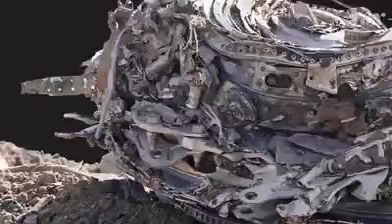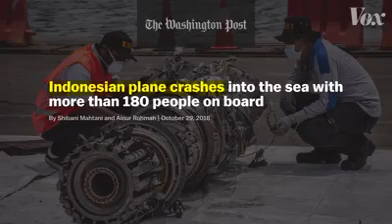This is an airplane engine. It's sitting in a field in Bishoftu, Ethiopia, part of the wreckage of Ethiopian Airlines Flight 302, which crashed on March 10, 2019. 157 people died. This was just a few months after another flight, Lion Air 610, crashed in Indonesia and killed 189 people. These two flights were operating the same plane, the Boeing 737 MAX 8.

And its engine is the key to understanding why this particular plane has caused so many problems. But there's nothing actually wrong with this engine. In fact, airplane manufacturers raced to put them on their new planes. That's where the problem started.

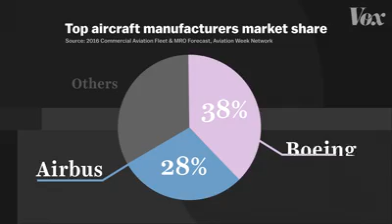The two biggest airplane manufacturers in the world are Airbus and Boeing, and they have a fierce rivalry. If one of them can offer a better plane, the other could lose a lot of money. That's exactly what was about to happen in 2010. Airbus announced that they would update their most popular model, the A320, a single-aisle airplane that services many domestic flights. You've probably been on one.

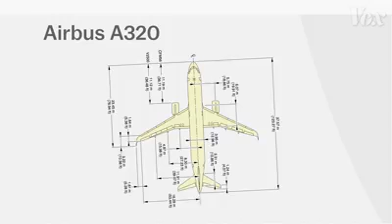For this new plane, Airbus had a big update. It would have a new kind of engine. It was much larger than the previous engine, but it would make the plane 15% more fuel efficient. And just as importantly, this upgrade wouldn't change the plane that much. A pilot could walk into the new model with little additional training and be on their way. It was called the A320neo, and it would save airlines a lot of money.

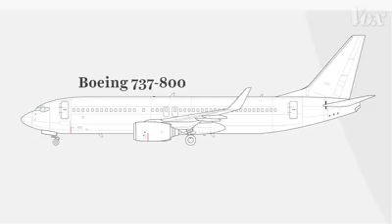This was a problem for Boeing. To compete with Airbus, Boeing's obvious move was to upgrade the engine on their single-aisle plane, the 737. But there was one issue. Here's a sketch of the 737 next to the Airbus A320. Notice how the 737 is lower to the ground than the A320. This meant Airbus could slide a new engine under the wing of their A320, but there wasn't enough room under the wing of the Boeing 737.

Boeing called this model the 737 MAX. And just like Airbus with the A320, Boeing said that their new plane was so similar to its predecessor that pilots would only need minimal additional training. The 737 MAX became the hottest selling plane on the market, and it helped Boeing keep up with Airbus.

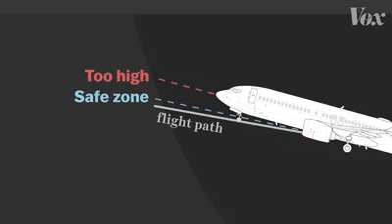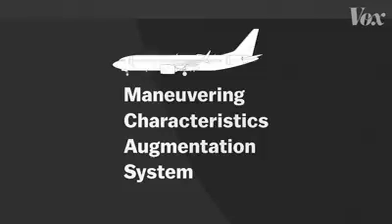Except moving the engine up on the 737 had a side effect. When the 737 MAX was in full thrust, like during takeoff, the nose tended to point too far upward, which could lead to a stall. This was a problem because these planes were supposed to behave exactly like the old ones. So Boeing came up with a workaround. Instead of re-engineering the planes, they installed software that automatically pushed the nose downward if the pilot flew the plane at too high of an angle. They called it the Maneuvering Characteristics Augmentation System, or MCAS.

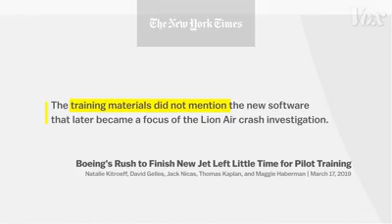But because Boeing was selling the 737 MAX as pretty much the same plane as the 737, they didn't highlight the new MCAS system. Many pilots only got a 2-hour iPad course before entering the cockpit for the first time. And the training material didn't mention the MCAS software. In 2018, several American pilots complained to the federal government that the 737 MAX was suddenly nosing down.

The pilots continued to fight with the MCAS. The plane struggled to gain altitude. Reports show it was likely because the computer was getting incorrect sensor data, pushing the plane toward the earth below. 12 minutes after takeoff, the plane crashed into the Java Sea. In the Ethiopia crash, the report shows that the pilots were actually able to disable the MCAS, but it was too late to overcome the malfunctioning MCAS sensors.

For now, nearly every 737 MAX 8 in service has been grounded, and the Federal Aviation Administration is facing scrutiny over how they rushed this plane through certification. Boeing's response has been to apply a software update that makes the MCAS less aggressive, while also saying they'll increase pilot training on how to turn it off. This problem started with the company's race to compete with its rival. It pushed them to pretend like their new plane behaved exactly like their old one, even when it didn't.